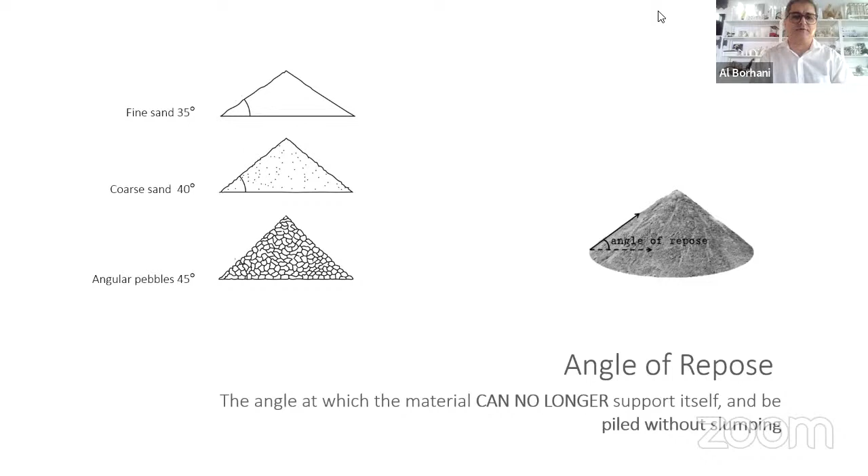The angle of repose is the angle beyond which material cannot support itself. Angle of repose depends on the property of the material, how fine or coarse it is, the moisture content of the material, the amount of friction between the aggregate, and so on and so forth.

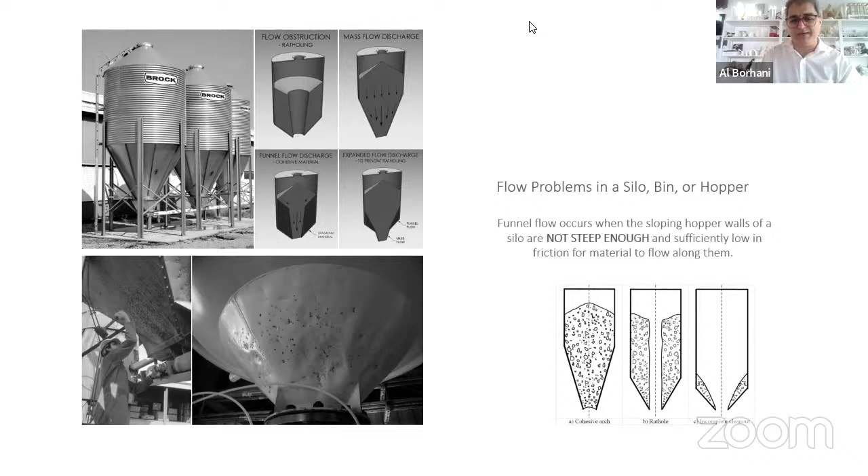And angle of repose is found almost everywhere, from a very small scale to a large one, and in many different fields, including construction and agriculture. Consciously or not, we deal with angle of repose. If you design some equipment, or a kind of bunker or hopper, for sure you should know a little bit about angle of repose. Otherwise, all the time you need to grab your hammer to move material, or you have some difficulty with your equipment.

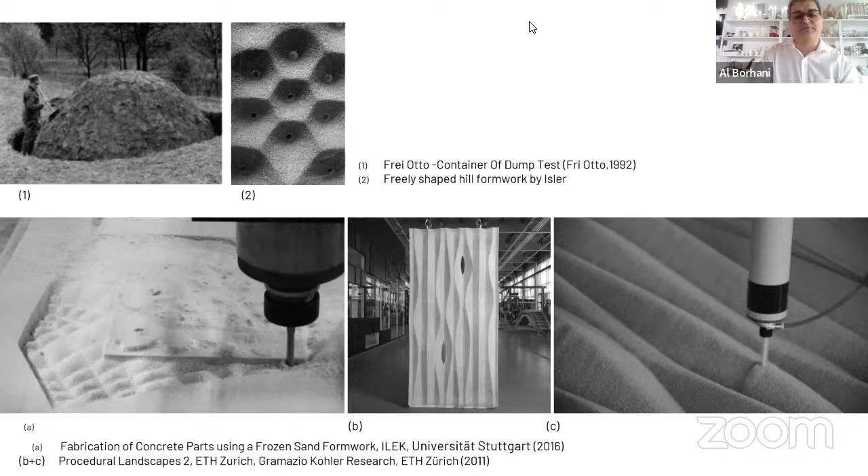Sand is not widely used in architecture, but we have some great precedents, from Heinz Isler to Frei Otto to the University of Stuttgart and Gramazio Kohler Research at ETH. All of them try to push the boundaries. Specifically, I would like to provide you some context on what's going on with sand.

If you have a shoebox, fill it with sand and wait forever, the shoebox is not going to be completely empty. This is a question I always ask my students, and normally they don't think the shoebox won't be empty. Because of the angle of repose, some material is going to remain there. And if you have a box with different holes, as you open up the holes, a certain kind of shape is going to emerge. If you repeat this experiment 100 times in every part of the planet, the outcome is probably exactly the same.

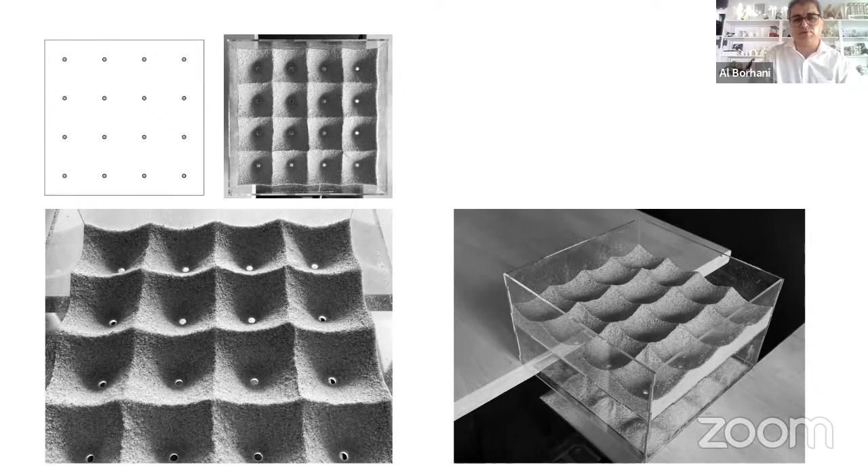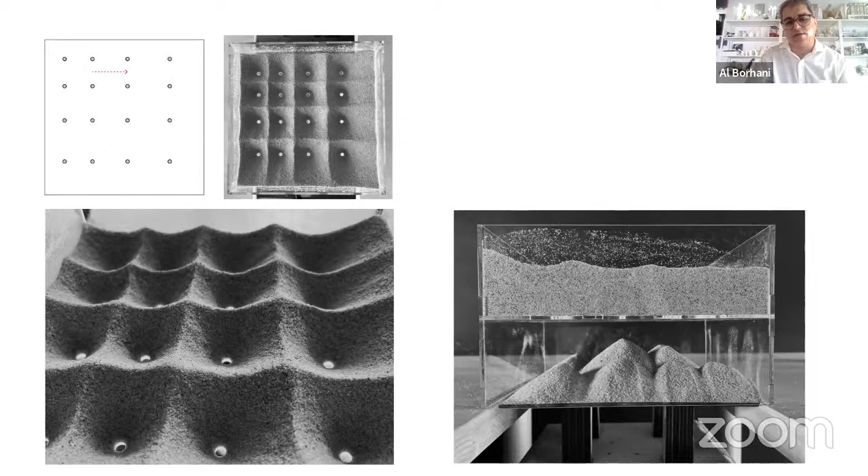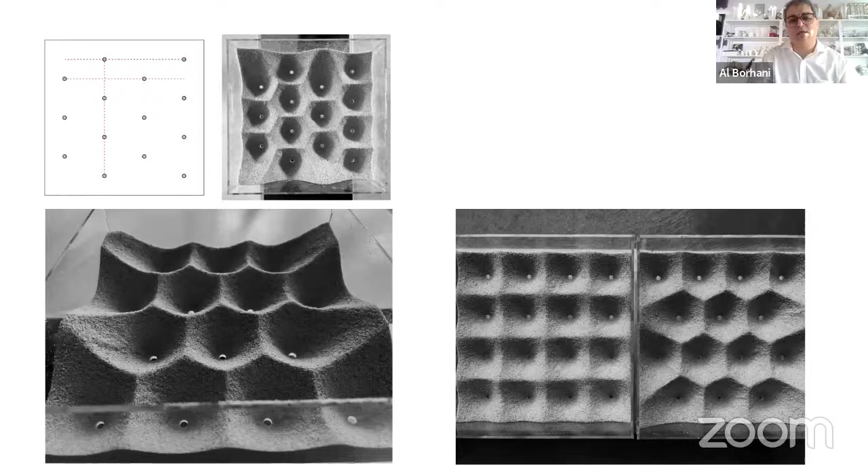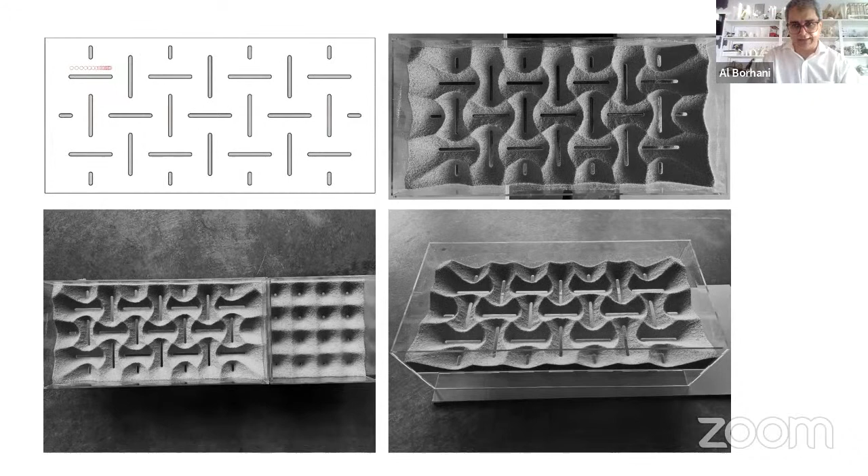The angle that you see here between the surface of the box and the body of sand is about 35 to 37 degrees, depending on the fineness of the sand particles. By altering simple geometric aspects such as distance, size, location, or orientation, you can make different patterns. It's interesting: just by moving some holes, you switch from a quad grid to a hexagonal grid. We can benefit from this principle to make more advanced patterns. In the previous slide you saw just one hole, but if we replicate the hole and create a line, the possibilities would be endless. The line could be straight or curved in any manner you may imagine.

In spring 2016, freshman students at the end of a very long semester ended up with the sand formation process. Prior to this design activity, they used CNC and made molds to cast plaster, and this design activity was probably a turning point for them. In the previous assignment, they forced material to take the shape they wished, but here the goal was to talk and negotiate with the material, and the ultimate goal was to remember that a designer is not the only decision maker. We started with a couple of quotes.

The beautiful conversation of Louis Kahn with brick, when Kahn asked, what do you want to be, brick? Or another beautiful quote by Frei Otto, when he said, the architect is not God the creator, the architect should be a midwife. It means you try to provide a condition and negotiate between different aspects of your design.

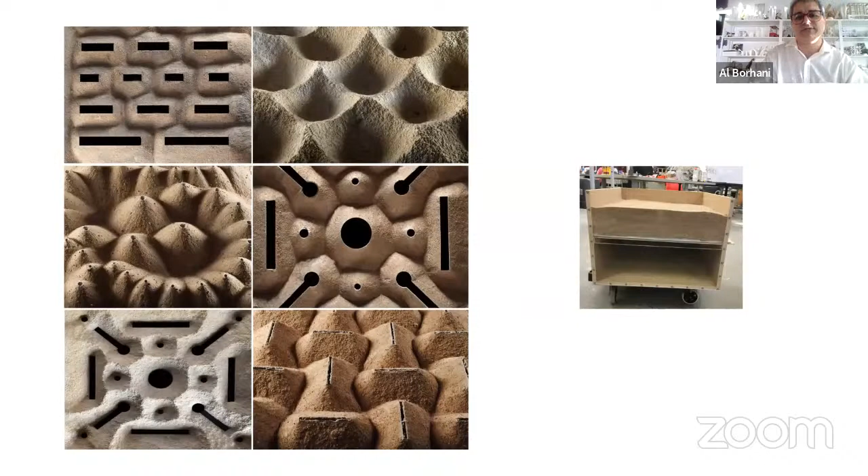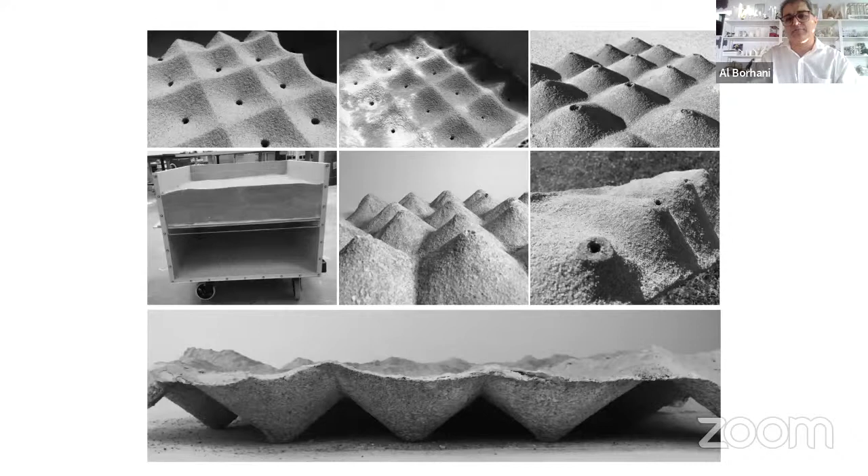Some examples of the front side and back side of the shells. And it was interesting, the journey from 2D to 3D: a very simple way of making a couple of holes on a board, and immediately you could jump to the excitement of 3D work. The process was about adding cement on the top layer of sand, when some water was used to make the shell.

Here we can see a simple diagram that shows maybe 2 different ways to make the shell. One way is to mix cement with sand in the beginning, and then go through formation. But here we decided to use sand as a kind of pure material, and not contaminate it with cement, as long as we wanted to use it many times. As long as we decided to keep the sand pure, we add water and we add some layers of cement. Here probably we can see the process.

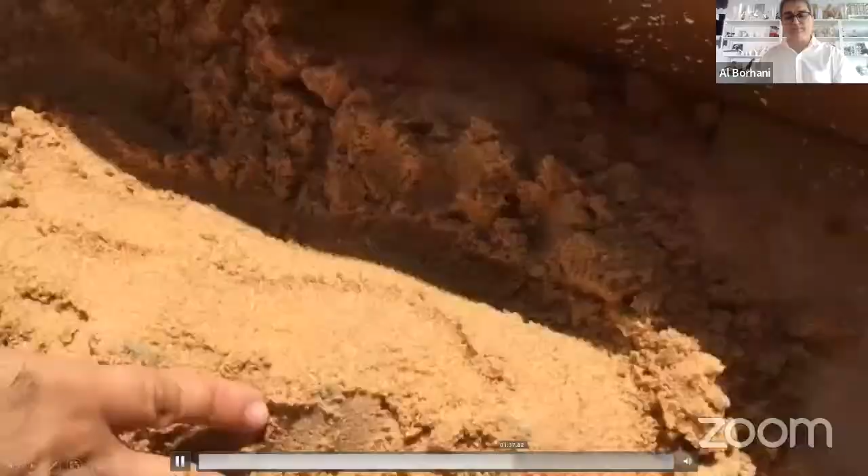This is the first shoebox that was used to see how it works, and this experiment was done by Frei Otto many years ago, and we tried to stand on the shoulders of giants. If I go fast forward, here you can see the holes are open, and the sand simply falls down. And then when we have the 3D form, water was added and cement in layers created the shell. Here you can see the first shell that was made, and then based on this quick experience, we could go forward.

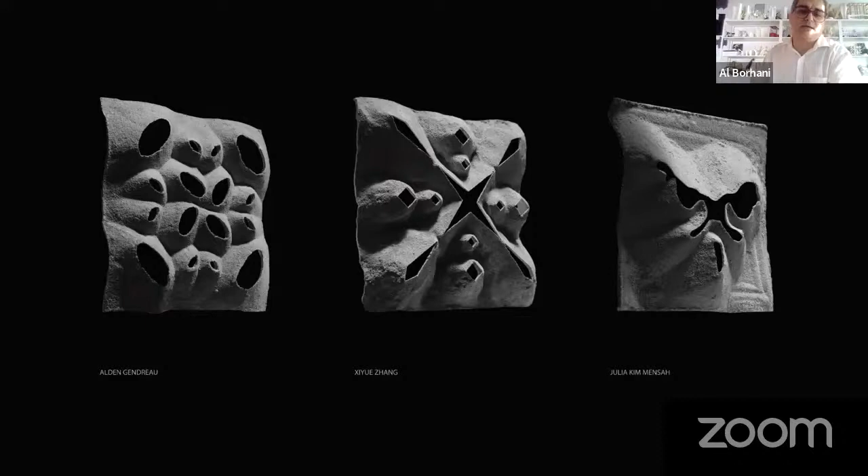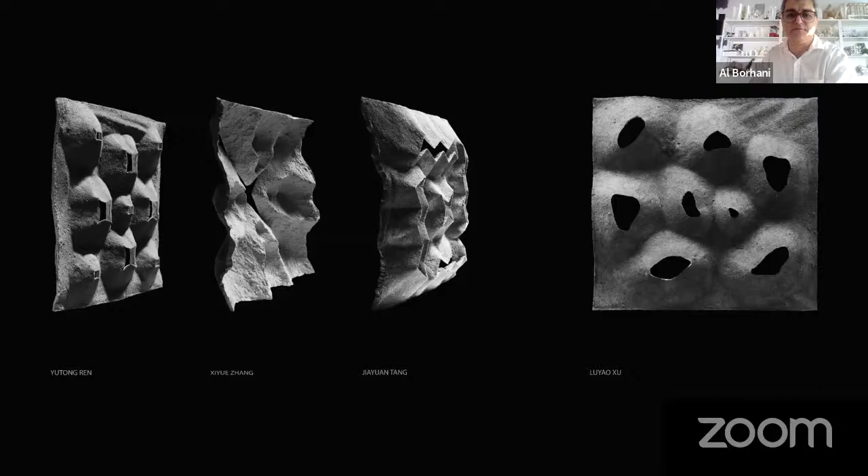These are some shells that my students at California College of the Arts made in 2019. Here we tried to explore more aspects of sand formation, tried to be more courageous to push the boundaries. And this is the assignment that I told you about before, sand formation, when we force material to take the shape that we wanted. And it was very interesting. The same student that made the right patterns could make the left patterns, meaning the same underlying geometry on both. Maybe the flesh is a little bit different, but the structure of both forms is exactly the same.

Here, I would like to talk about another method. It's about dumping sand on a plate. Again, it's based on the angle of repose. When you have a square, the outcome would be a pyramid, and so on and so forth, and depending on different boundary conditions, you create different kinds of three-dimensional form. We took advantage of this to think about a kind of space architecture, what might be a kind of habitat on the moon.

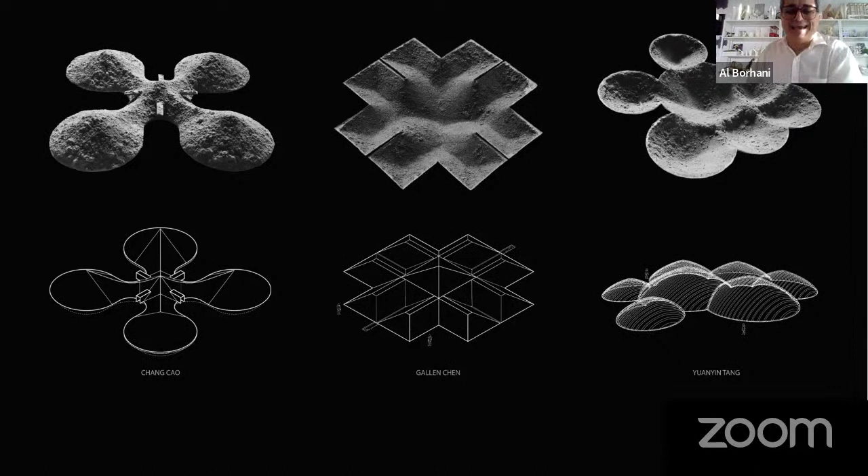This journey started with the question of what happens if you want to take one brick from Earth to the moon, how much you should pay. Based on NASA's estimate, you should pay $250,000 for moving just one brick from Earth to the moon. And still we are talking about the moon, not Mars. For whoever wants to make anything on Mars, it's 6 times more expensive.

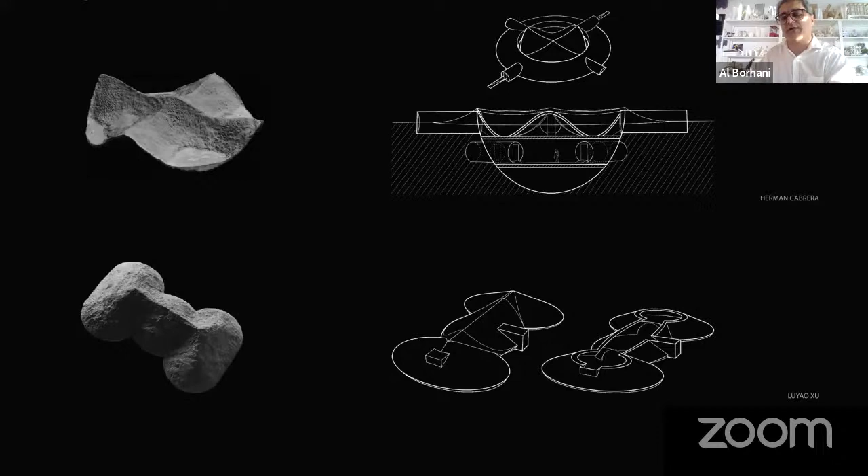And the question is how we can take advantage of the existing material that is on the moon, and think, okay, we don't have any shoebox over there, and if we want to make this kind of shell, what can we do? Probably dumping could be a solution, and maybe the surface could provide some opportunity for 3D printing. It would be a kind of scaffold.

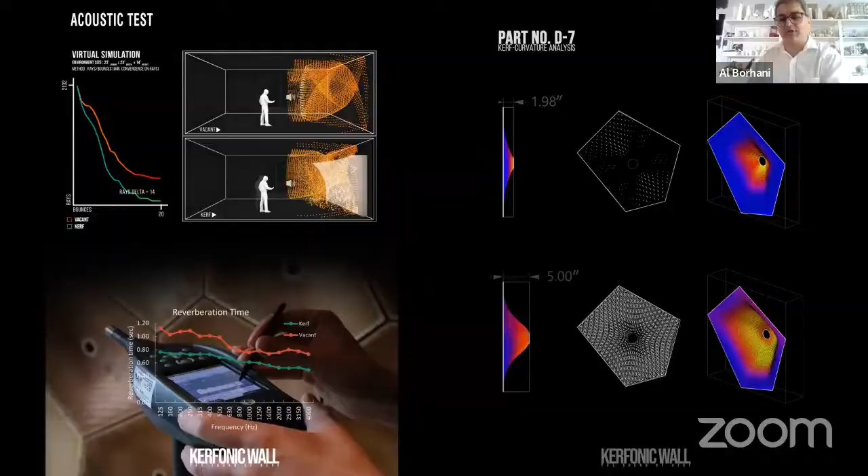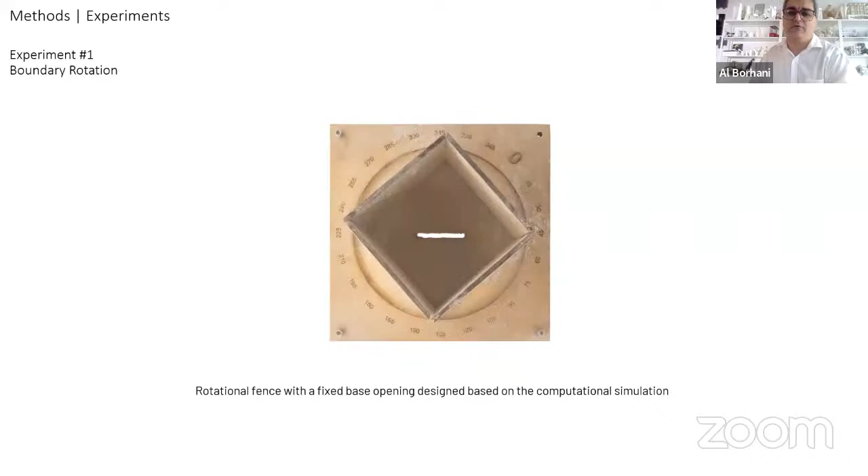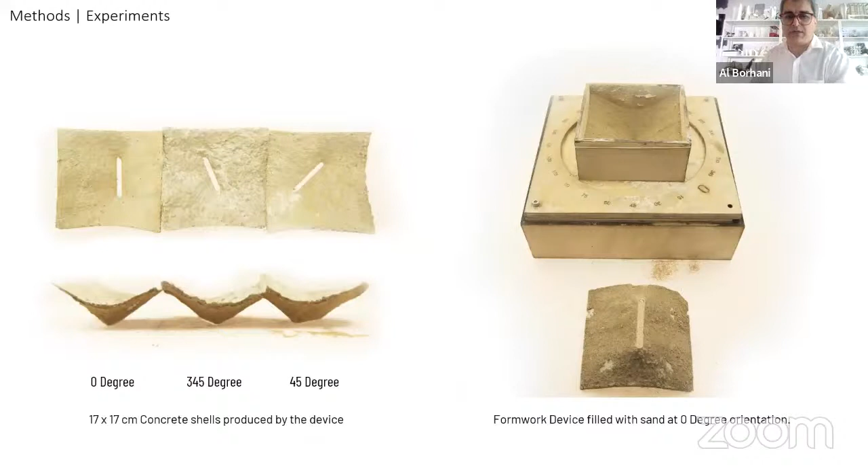This is the last thing that I'm going to share with you. A project that Jiris Alali, Nigar Kalanta, and myself were involved in. Jiris pushed it forward for a long time. Jiris came to California College of the Arts to pursue his master's degree, and the goal was to think about low-tech and high-tech. The way this research proceeded was to think about one formwork that could create many tiles at the same time, taking advantage of the angle of repose. By making a device and having some openings, we could create different tiles.

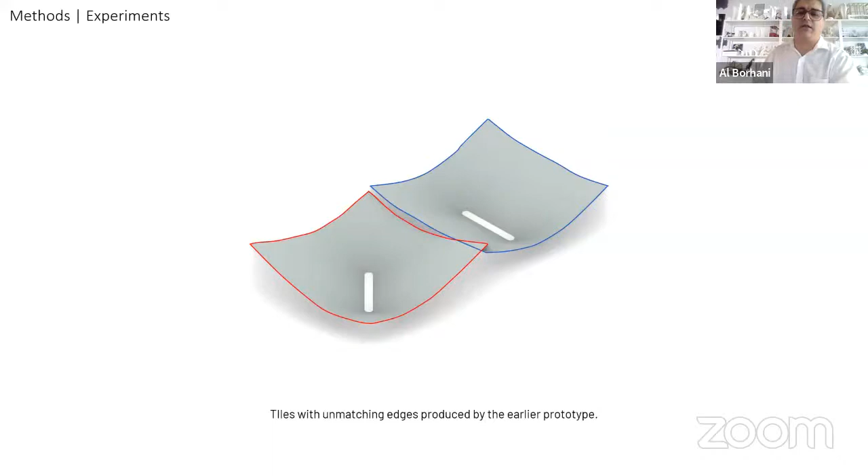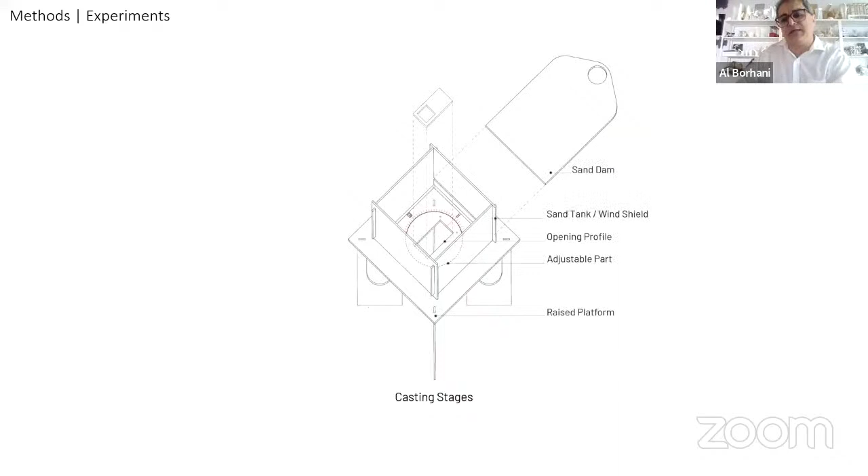The design question was about the condition of edges. As long as we turn the device, the material doesn't have any tendency to create the same curvature for every tile. And then we decided to push it forward. The solution that Jiris ended up with was to create the edge free, and the goal was to have a device that we can simply take to a site and do the process of casting over there. And by changing simple pieces, different parts could be made.

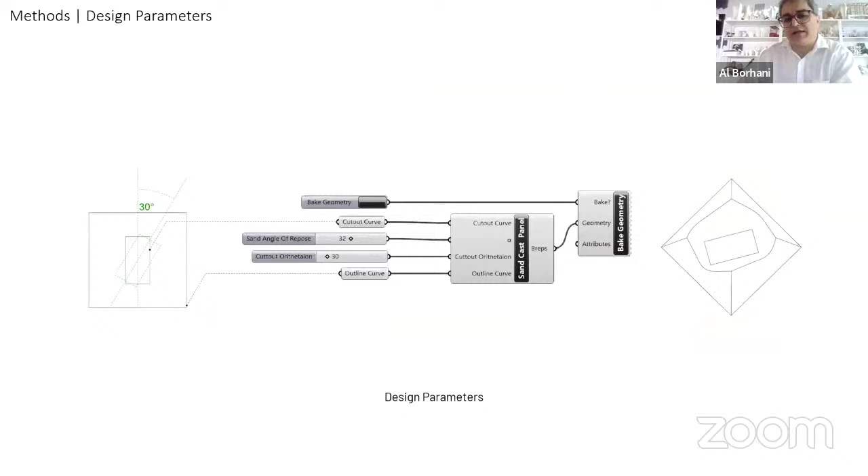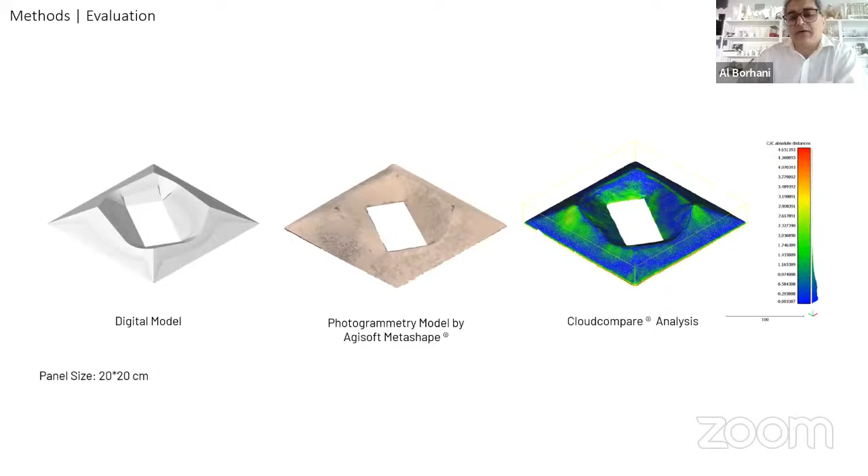Here, a Grasshopper definition was defined to do simulation quicker and faster and see the result in cases where we could not do prototyping, especially during the pandemic. And when we did some scan analysis and compared the shell that we made with the Grasshopper model, it was pretty accurate.

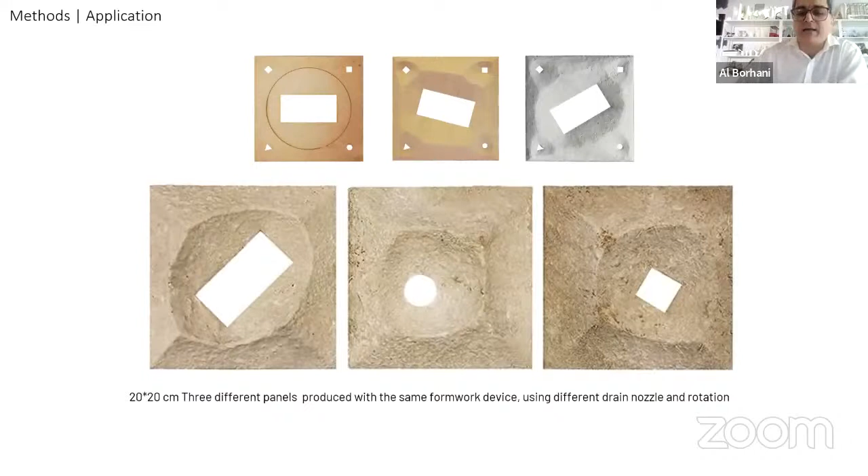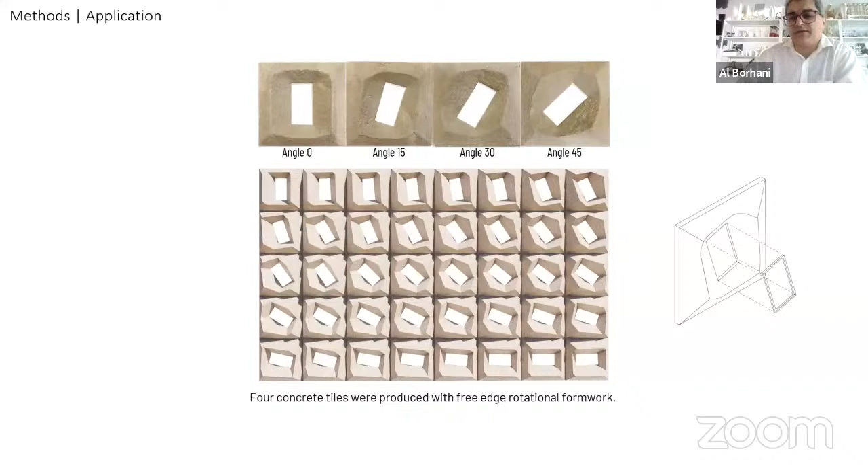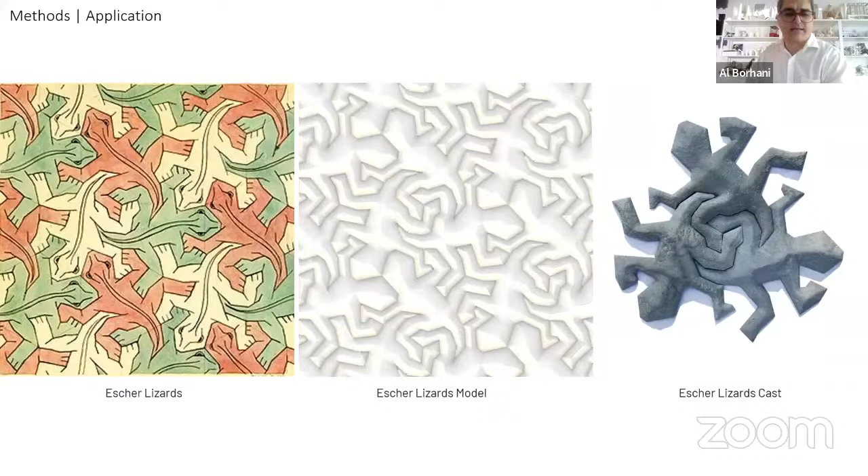Here you can see different kinds of patterns. Panels could be made by changing simple parts, and it could be a possibility to think about some kind of fenestration, some kind of tessellated tile for building envelopes. And by using a dumping system, Escher patterns were investigated. And as you can see, the process of formation is super fast. And then the question is how you are going to use the formwork to make the tile.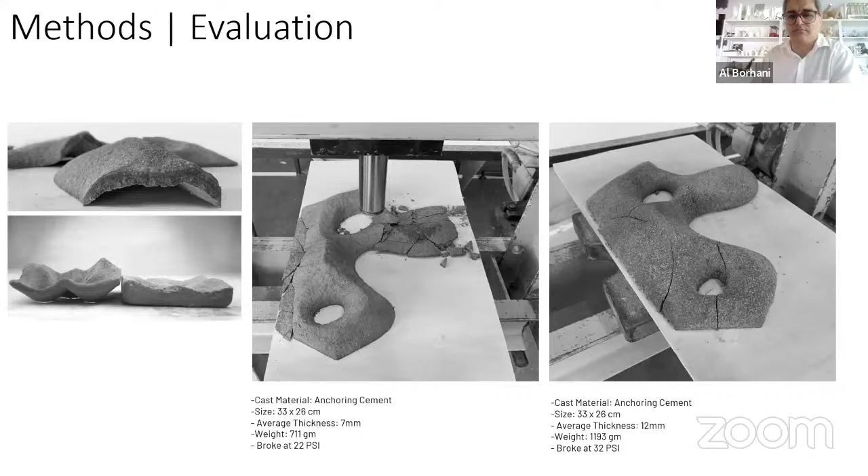And at the end, some structural evaluations were conducted to see how much load they are going to carry without using any material at this point. We didn't add any fiberglass or any material to the combination of cement and sand, but for sure more lines of investigation are going to push forward.

This is a brief introduction of something that we enjoyed in the last couple of years, and we hope to learn more from our discussion. Thank you.

Al, thank you so much. Inspirational. So many questions I have for you already. It's a pleasure to see that work. Now, I'd like to introduce our second guest. Jumaanah Alhashemi is with us.

Jumaanah's presentation will first look into sand material explorations done on a micro scale using laser sintering processes. The second will look into macro scale implementations and the potential interaction between sand and water and green facades. And Jumaanah's presentation will close by looking into applied digital fabrication strategies that allow for sand to remain transient and take part in a dynamic ecosystem to help us reshape our experiences with materiality.

Jumaanah, welcome to the session. It's a pleasure to have you here. And I'll let you share your work with us. Looking forward. Thank you so much for gathering us today as well. Let me just share my screen. Well, thank you so much, Marcus, again. And I feel like this talk has been very fitting, especially since Earth Day was literally a day ago.

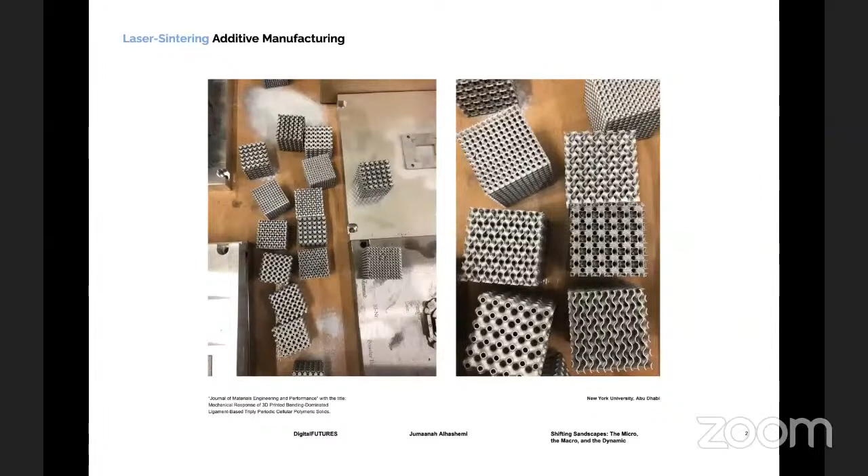And so my topic is really looking into shifting sandscapes, looking at the micro and the macro and the dynamics of sand properties. So my experience with sand has been really incidental. I really started working a lot with direct metal laser sintering technologies, specifically with EOS 3D printers. And EOS is one of the leading German companies that have really worked with powder bed fusion and depositing of materials on a layer basis. And at that time, I was getting trained as an application engineer in Germany, so I was going back and forth.

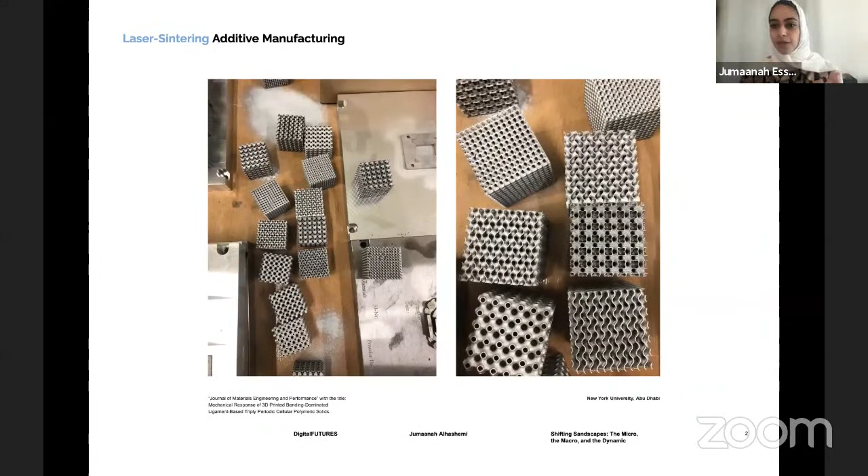And at the same time, I was doing my fellowship at the Rhode Island School of Design as well, and learning glass for the first time. And I felt like this process was extremely insightful. It was almost like this eureka moment, really looking at granular materials and trying to transcend them from one state to another, from sand to glass, for example, or from scattered to gathered, and looking at these different explorations that I've done.

And to be honest, it was a really inspiring journey, because it really started getting me into these other disciplines, and being a transdisciplinary designer and artist, I really believe that there's a really great relationship or sparks that happen from trying to shift or travel between different disciplinary borders.

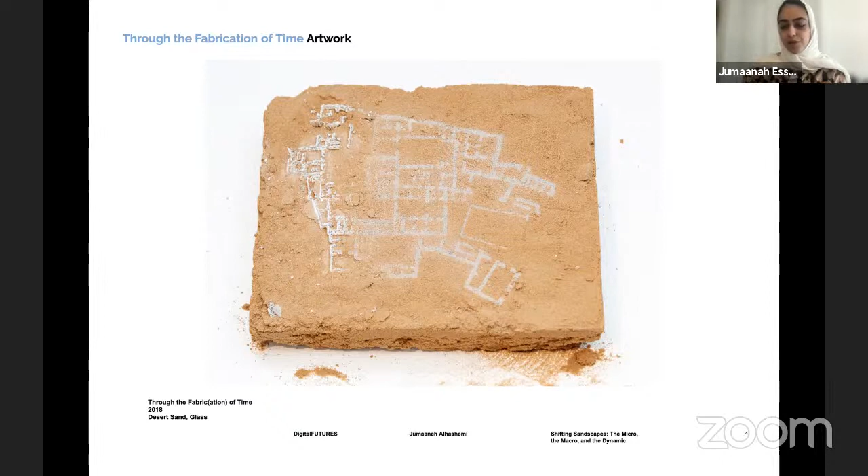And through this work, I actually ended up pursuing my master's in digital and material technology at the University of Michigan. And so I wanted to really start looking at the micro. So what is sand as a granular material, and what really happens on a micro scale? And in here, what I was really trying to do is understand the difference between silica sand and desert sand specifically. So I'm from the United Arab Emirates, and the desert is a landscape that I'm extremely familiar with.

And it's a landscape that I've been exposed to my entire life and have extreme appreciation for, and really believe that it's become a part of not only a natural phenomenon, but also a part of this culture and identity of trying to preserve it as much as you possibly can. And so I was really looking into desert sand and silica sand on a micro scale, and what makes them different, and why is silica sand more favorable, and why is desert sand really frowned upon in the industry.

And really, the problem with desert sand is that the grains are traveled by the wind, and the wind actually makes them extremely rounded. And for that reason, it makes them really unstable, so you can't really bind them properly. While on the contrary, with silica sand, the grains are extremely angular, so they fuse better, and they're mostly shaped by water, and they're found in beds and banks and floodplains of rivers, and in lakes and in seashores.

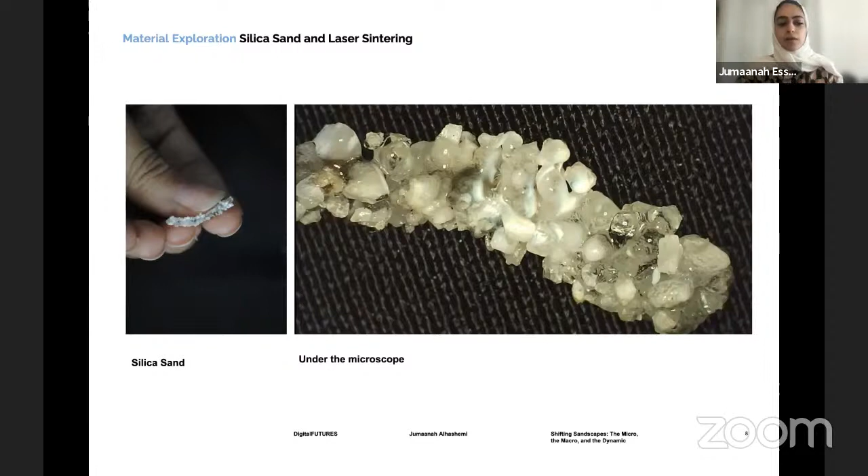And so what I did first is really simple. I just scattered some sand onto the bed of a laser cutter, as simply put as that, and tried to sinter as much as possible, very slowly and with the highest power that the machine would allow me, to try to create glass. Sorry. So on your right you're seeing it more under the microscope, and on the left you're seeing it in its real scale.

And then after that, I wanted to see if possibly there's a way to fuse the sand together while also doing the sintering process. And in this case as well, I have also worked with water-based agents, specifically sodium silicate. So what I did is as simple as going through hatching patterns that are sintered by the laser. And as you can see at the bottom, is the glass that is sort of trying to emerge while also keeping it bonded.

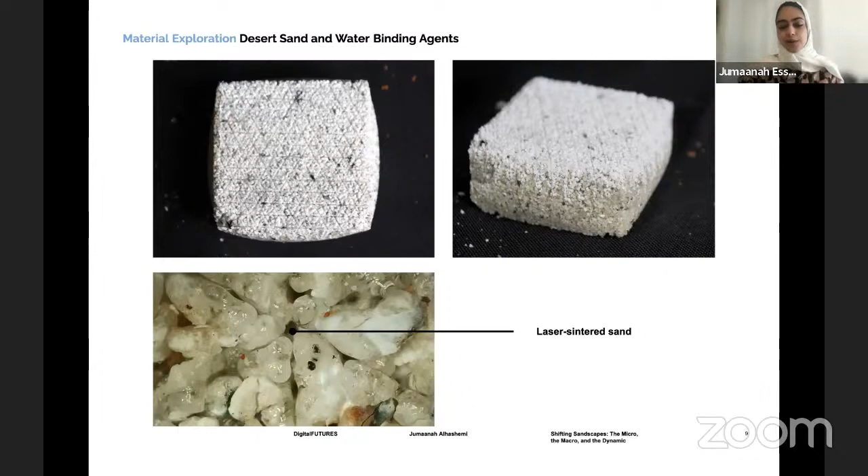And this is using finer grains of desert sand. And as you can see, because it's quite fine, it looks extremely neat when it comes to the laser sintering, and the glass penetrates through evenly. And it's really trying to see what occurs with the sintering as it's creating this molten glass. And the more that you run it through the sintering process, it will keep forming more glass. But it takes a really long time though. Like this piece took about 4 hours to actually sinter it to something close to glass.

So they've built this entire neighborhood that has become abandoned because of the moving of the sand and the wind constantly having to push the sand inside these houses that have become abandoned. And it really shows you just how remarkable and how strong and dynamic winds can really move particles from very large distances into creating these really large volumes and bodies of landscapes.

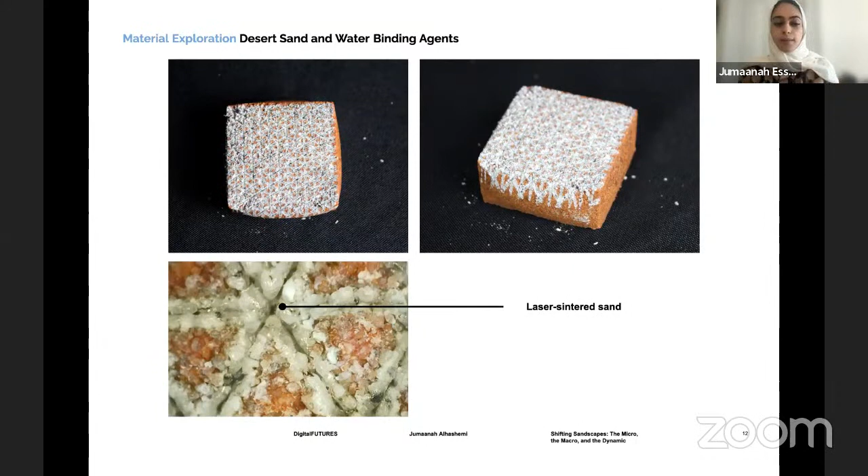So now it's really looking into the macro, more on an architectural scale, and really trying to see how sand can be a material that allows for the delivery of water, specifically through capillary action. So this body of work was really made with great colleagues of mine that have been such a pillar in making this happen. So this is a project called Wild Wall, which has been done in conjunction with a class last semester that I've taken at the University of Michigan called Material Engagement, under Dr. Mania Meibodi.

And it's really looking into creating a green facade that can be powered by some form of capillary action that allows for the water to keep going, allows for the collection of rainwater, and really allows for it to resurface back into the facade by capillary action. So this is a concept that has been just in the conceptualization phase. It's really looking into incorporating the sand inside as a way of insulation, but also as a way to allow for the movement of water to surface up to the pods, which you will see later. So these are just some tests that we've done that we believe might work, but this still has to be studied even more to see if it can be employed.

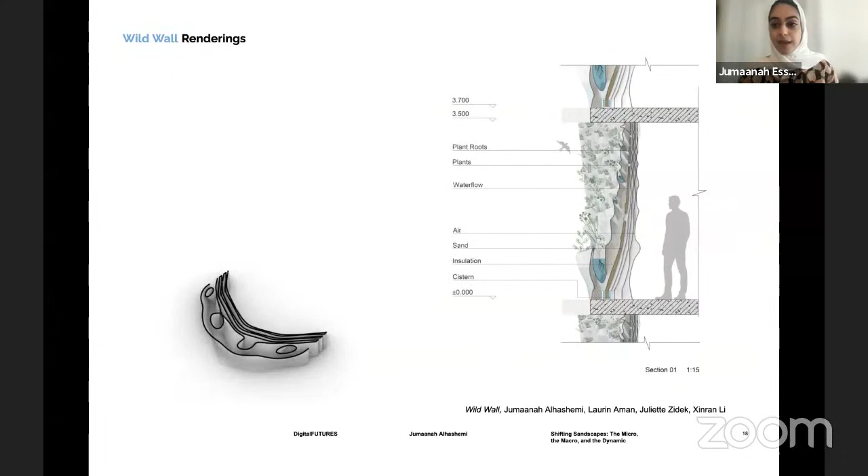So the project was mainly looking into 3D printing facades, and we were working with plastic pellets because that's what we had for the time being, and that's what the extruder, the end effector, was working on. And so what we did is we designed these pods that are ranging in size according to the plants that they would house, and it's computational and can be changed. And what you can see on the left is the sectioning of the 3D printing that allows for these pods to form.

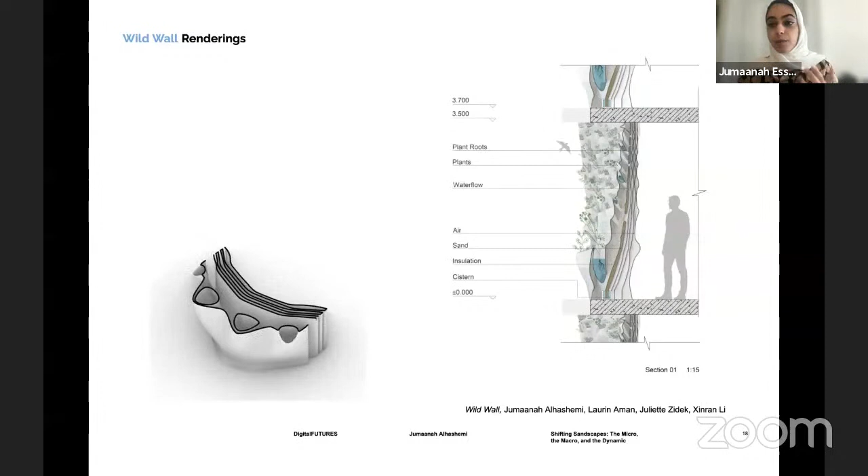And then on the right, you would see a conceptualization of a section that we have, looking into how the sand could be housed within this structure, within this facade. And what's really amazing about 3D printing is that it allows for 3D printing a multi-layer facade in one go, rather than having to add these different aspects of the facade.

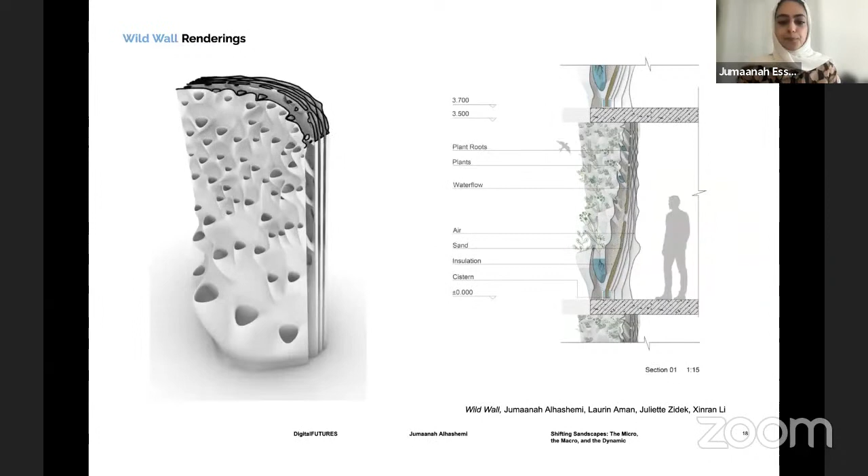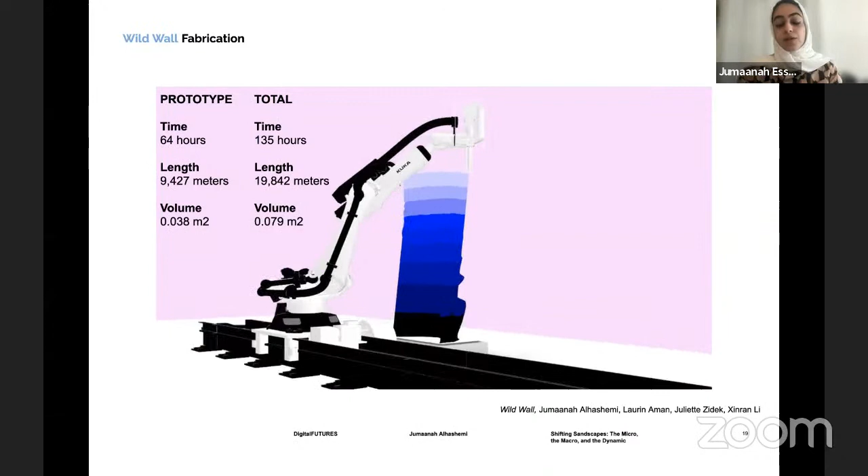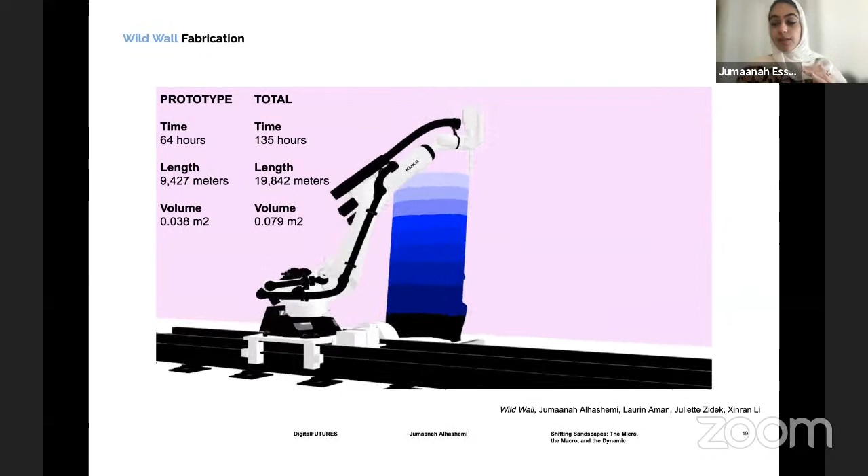So the prototype took about 64 hours, and it was around 9,427 meters. Of course, we didn't reach all the way to the top because unfortunately time is of the essence, but we were able to reach the first 4 levels or sections of 3D printing. And of course, it's limited to how much the robot pendant can hold as a file size as well. So this is the process of 3D printing it, creating this path that could be continuous, and also generating these pods and seeing if there is a way that we can actually house a couple more materials inside. So this is basically the process video.

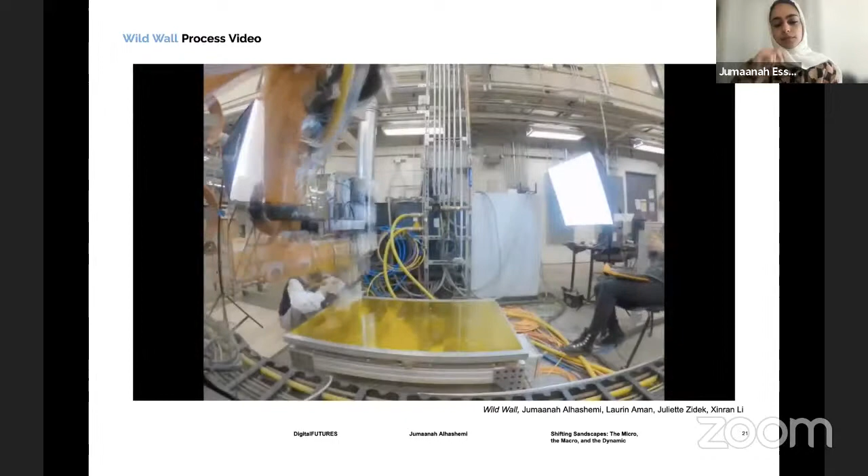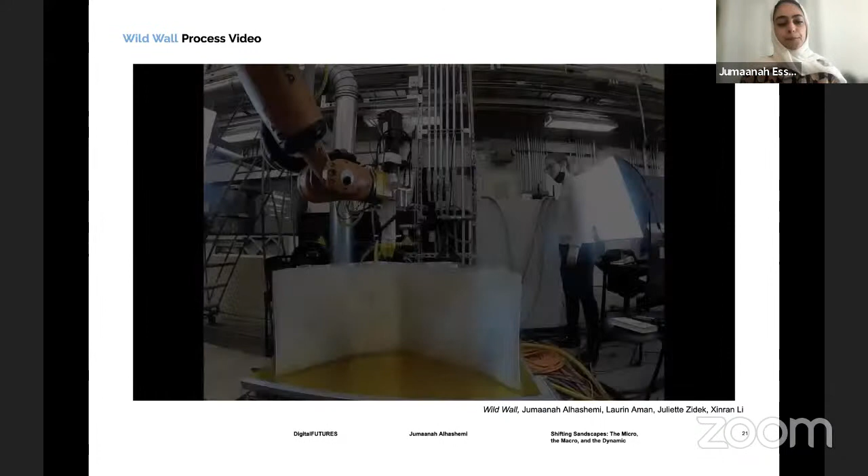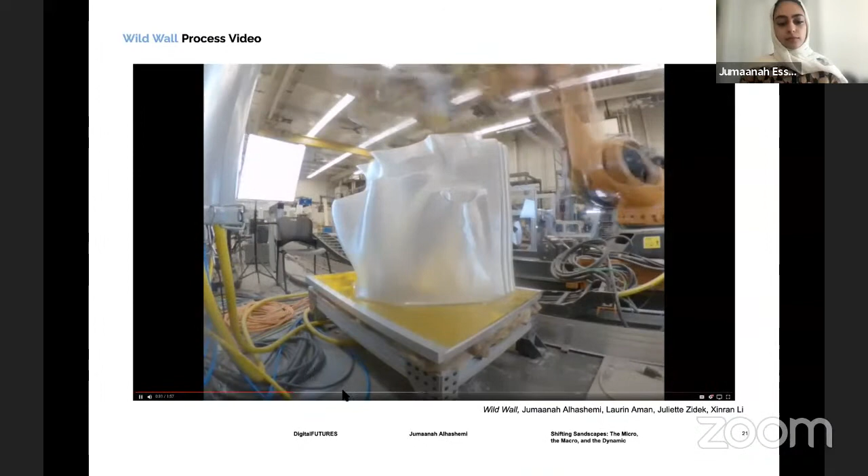So this is the back of the 3D printed facade. And this is the second layer of 3D printing. So this is basically just a prototype that we have been able to 3D print. And it took around, if I'm not mistaken, 36 to 40 hours.

And it's really showcasing how these, and really we've added some plants in there to just see how they were being housed in the pods. And this is sort of an artistic shot into really seeing the scale.

So now I'll be shifting into really looking into the dynamic and really allowing for sand to allow for impermanent structures to emerge, and also allowing for it to be transient. And to be honest, as Al has mentioned as well, sometimes it's good to let go as a designer and really allow for the material to flow the way it should flow. And it was a really great exploration into understanding how sand particles really accumulate and amass, and really thinking of a way to really work with that.

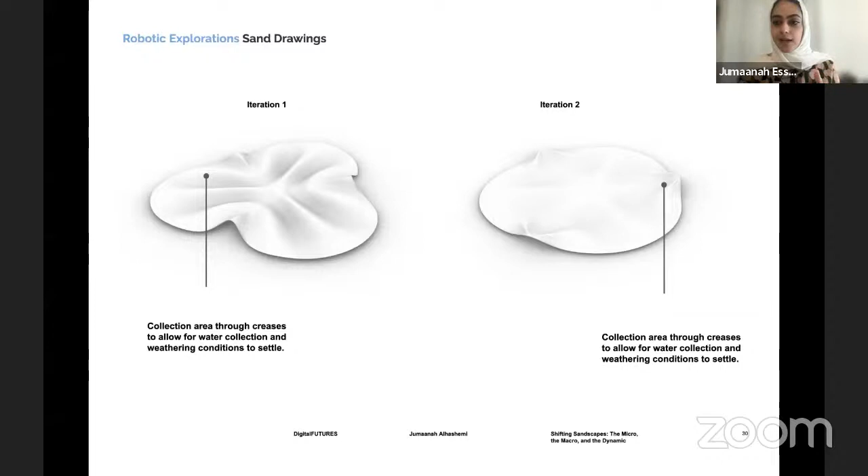So what I was really looking into is designing this path, or these really simple movements that allowed for the robot to move the grains around, and not really dictating exactly how they might look, but trying to see and understand how the grains were to form. So as you can see here, it's such a very clean curved surface, but with the path of the tool as well, that allows for these different surface articulations to really emerge.

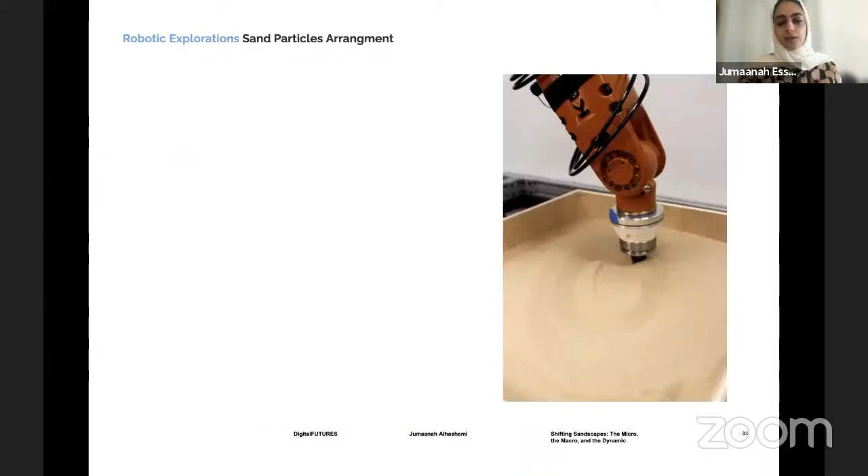So there is one over here, and then this is actually a very quick study that I've done. This work is still in progress right now, but basically allowing for this incremental forming of the sand as well, to go down very slowly, and to allow for the sand grains themselves to try to rearrange themselves within this path, and it really created its own sort of path. So as you can see here, it's almost like the path has been offset somehow, which was really interesting.

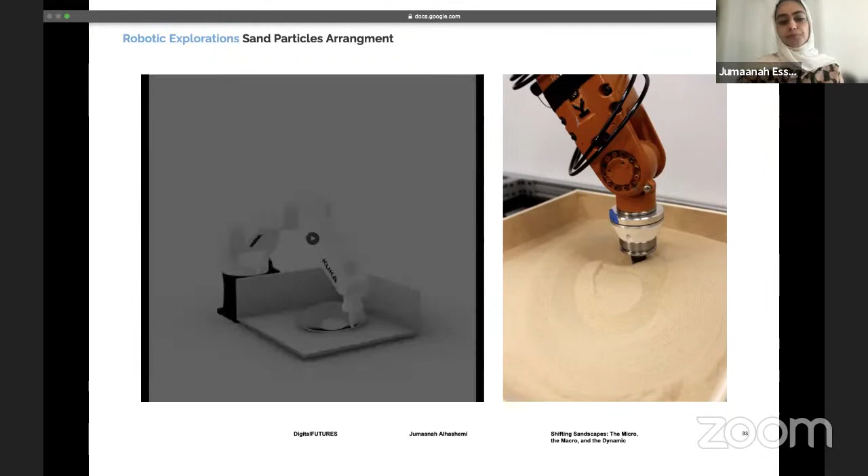And what I did is that I slowly sprayed onto it some water-based binders to allow for the hardening of it softly, to allow these different articulations of the surface to remain, and to allow these really thin shells of sand to form. It was a really quick study, and it's currently still under work, but it's really interesting how thin but how strong the shell has been, and it's been sitting on my desk for quite a good time now, and it's really surviving.

The next step is really looking into seeing what happens when you apply a very strong amount of wind, and what happens when you put it into these different weathering conditions that occur in nature, especially in the 4-season climate, where you have rain, snow accumulating on the surface, and very strong winds that could allow for this movement of sand to take place again, especially since the structure is not as perfect or as pristine as it should be.

And that's basically it. Thank you.

Okay, Jumaanah, thank you so much. Really inspiring. I can't wait to get further into your presentation and also Al's.

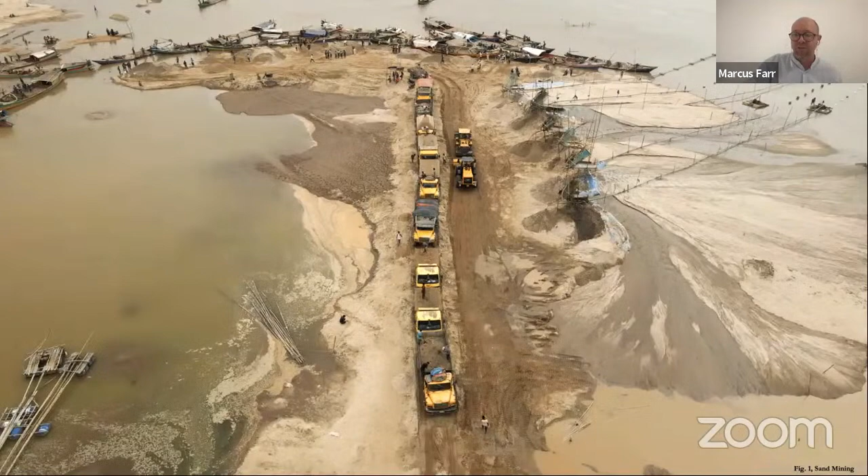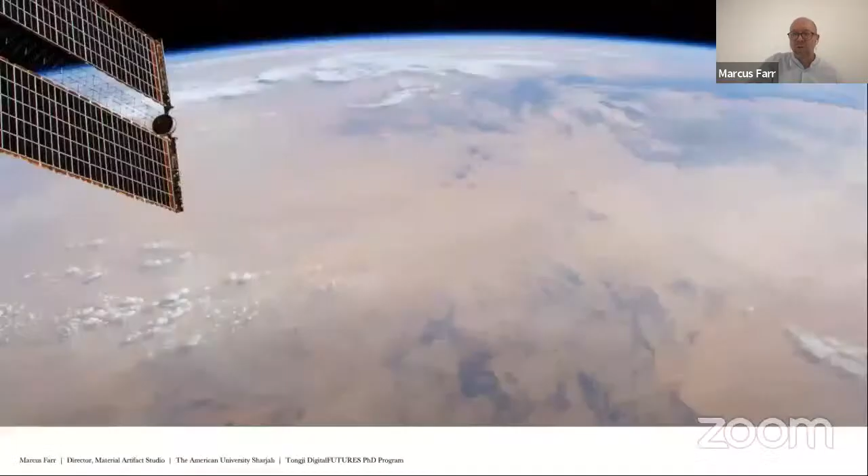And the UN projected that sand and small-scale aggregates will continue to be in demand above all other materials through 2060 because of the almost unlimited need for concrete and consumption of concrete in the world. So this sand that's mined is also being shipped thousands of miles around the globe to build buildings in different regions that are very different from the locations that the sand was gathered.

It's estimated that only 5% of the world's sand is usable for architecture. And so construction sand comes from rivers and beaches and special mining locations. Marine sand and river sand are very different than dune sand, as Al and Jumaanah have already mentioned. One is conditioned by water and the other is conditioned by air. And the largest deserts in the world contain dune sand as opposed to marine sand mostly.

So a huge percentage of the world's most desired construction resource cannot be used based upon current construction processes. So this for me is an unsustainable relationship between the amount of sand that exists compared to the amount of sand that we use for building.

The contrast continues as population explodes and desert cities invest in architecture that fuels a continued need for these processes, and urban centers such as Dubai, which is where I live, Dubai and Sharjah, and the relative proximity to so much unusable sand creates a striking contrast between resources and construction methods. And so the buildings here constructed of steel and of concrete require sand that is much different than the sand that we have in our context.

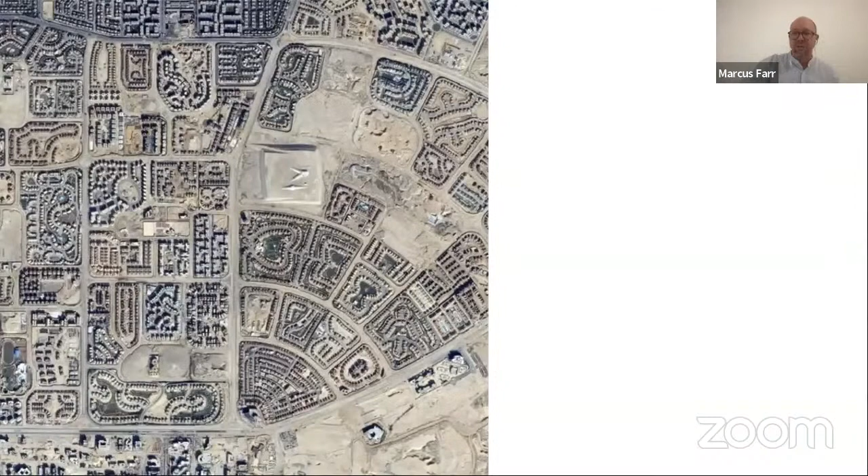So my research interests really explore material development using dune sand as a local material resource for architecture in desert communities in the Middle East and North Africa region. So more specifically, as it relates to material, a lot of the materials that are vernacular to this region employ other materials besides sand, mud and coral and other things, shells. But sand is not really found as much as a primary element in the vernacular materials because sand needs a binder.

And dune sand is difficult to work with and cannot be used in concrete the same way that marine sand can be used because of 5 primary qualities. Number one, it's round in shape, it's very smooth, it has a particle size that's very fine, and it's alkaline in nature. It's also very dense, similar to dirt, so it's very difficult to work with and to make concrete out of.

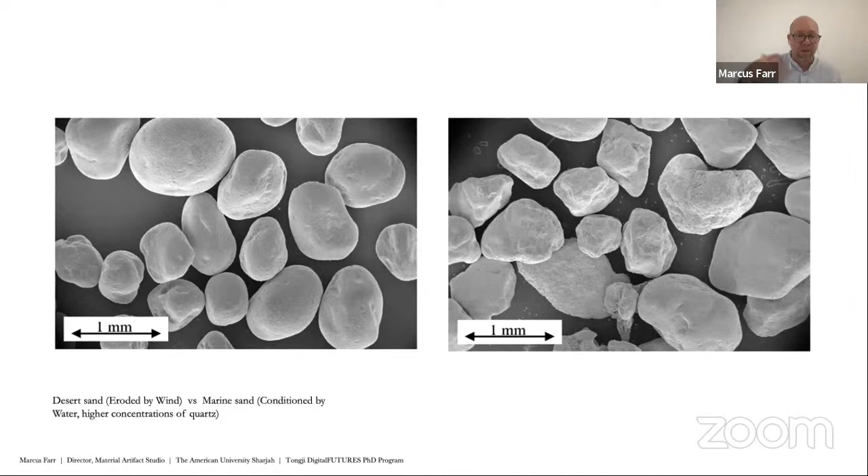And so that leads me to my first material experimentation. So the first part of this research looks at how dune sand can be combined with binders to create a sustainable building material for our region. So the caveat here is that toxic glues or resins of any form really are not allowed in the work.

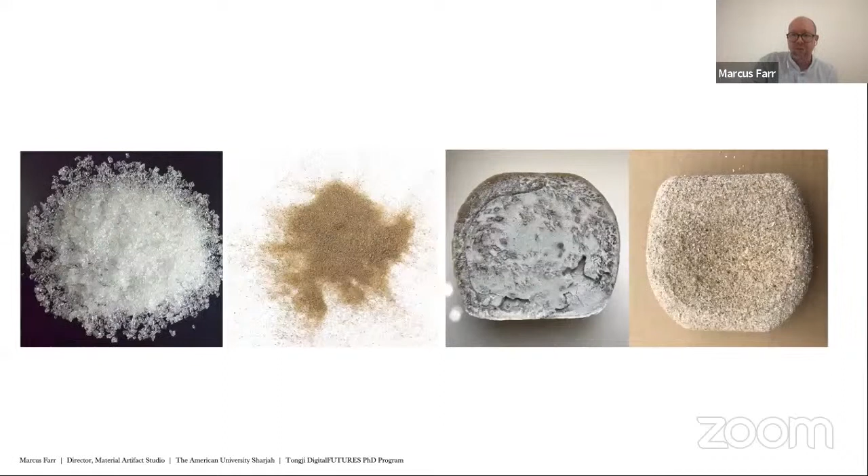The EPA and the American Federal Food and Drug Administration consider it safe to use in foods such as table salt. And the strength of this varies based upon the amount of sodium or salt and sand added together. So the additive is effective because it changes states with temperature variation, which allows the sand and the salt to bind together in a superheated mixture. And upon cooling, this process forms a strong unit. So essentially we're moving from solid state to liquid state, back to solid state.

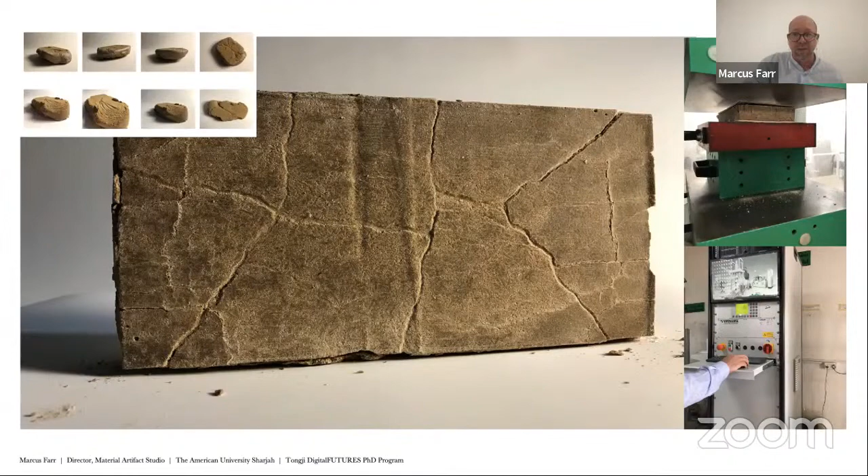But the creation of a biomaterial that had compressive strength was really a significant step forward for this particular moment in the research, because it led to the possibility of an organizational system that could be applied to local scenarios in the Middle East, namely mashrabiyas and jali walls, which are very common in the Middle East and also India and North Africa. So since one block size is being used to create the mashrabiya here with a single point of connection in the center, it allows the bricks to be cast exactly the same and operate independently of one another.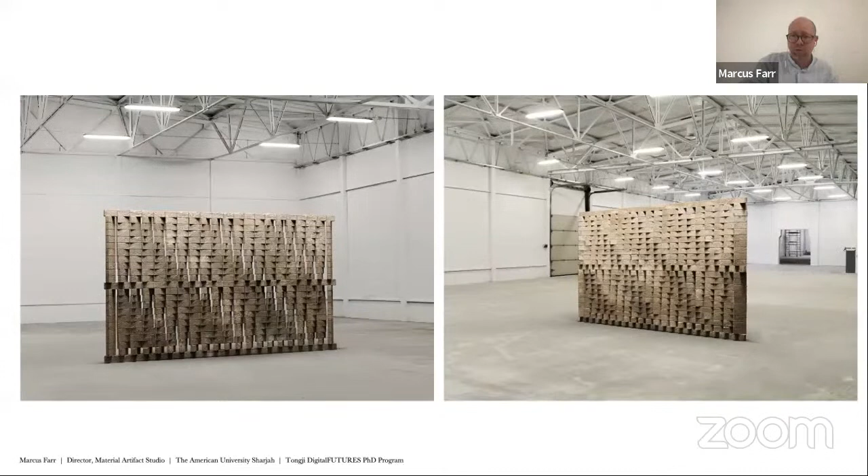So this was the result of the sodium sand wall. And this was the result of the wall condition with only 2 of the materials, just dune sand and the sodium. And so this was a step in the research that led us to another material exploration, really because we felt that the sodium was not a long-term answer in terms of sustainability. And so we were looking for additional approaches.

And so we looked at some material that's used by the US military to make roads and tracks in tropical locations and extreme climates. This is a low-cost material. It is not affected by the sun. It's also really important in that it's non-toxic to plants and to animals, and it's water-based, which is very different than some other materials that we've used with the sand.

And so this is a slump test that we're seeing here. It's normally tested as a spray-on material with road crews to make roads and trails and places for cars to drive on. We tested it as a formative material for 3D printing. And what was desirable with this material binder as compared to what we did previously with bacteria or sodium was that much higher concentrations of sand compared to additive can be used, and it doesn't require a lot of binder to generate a large amount of material.

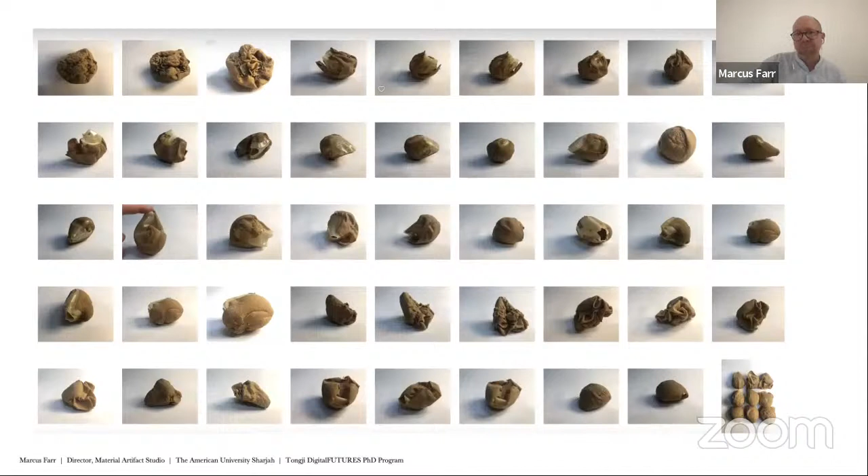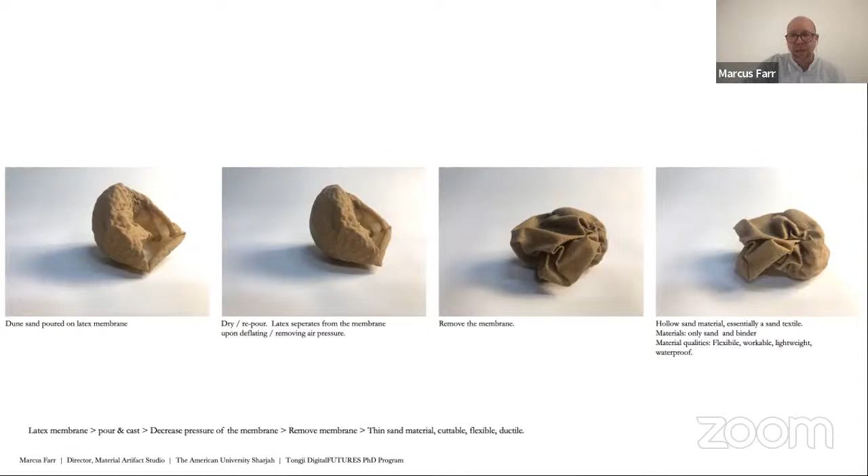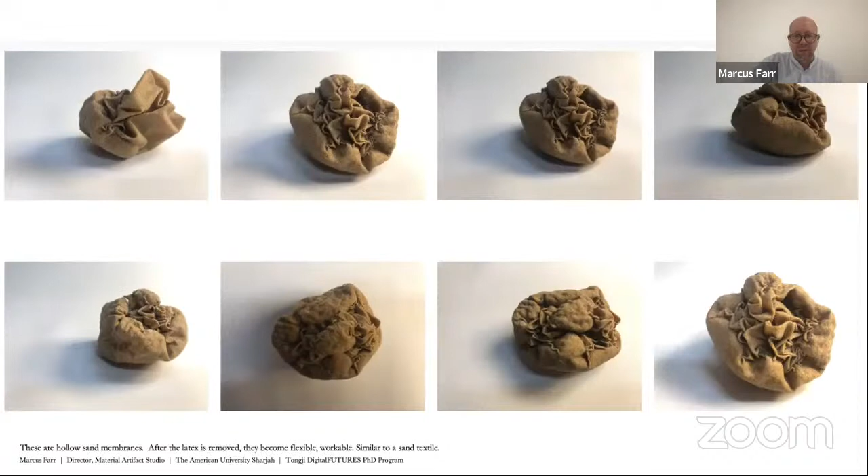So we tested the workability and the castability of this by pouring it on latex membranes, and then allowing those membranes to change sizes, to get bigger and to get smaller, basically by adding air or removing air. And it created a series of iterations that really are kind of these flexible, workable, sandy textiles that start to look like this. They're flexible and kind of rubberish in nature. And this is made from dune sand and one binder, and they're flexible.

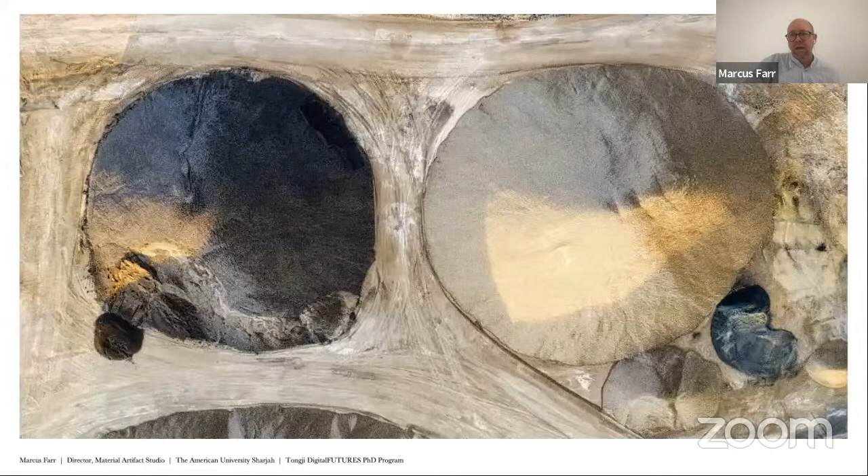And so that led us to look further or deeper into how sand behaves as an organizational material. And what's interesting, I think, that's come out in the first two presentations for me is that the angle of repose is important to everyone's work.

That when you use sand, this is just kind of a part of how you think about it and the limitation. So it becomes a critical threshold, working with piles and small aggregates and angle of repose. And so it's typically between 34 degrees or 45 degrees, maybe depending on the size of the aggregate or the sand. Wheat is different than sand, and concrete aggregate is different than wheat.

But this is from Mathematica, and it's really similar to what Al was discussing. When you pile sand on an articulated plane or a limited plane, which is different than an infinite plane that you find in the computer, the shape of the plane can begin to affect the shape of the pile. So round planes create different piles and rectangular planes, etc. And it was really fascinating for me to see that in your work, Al.

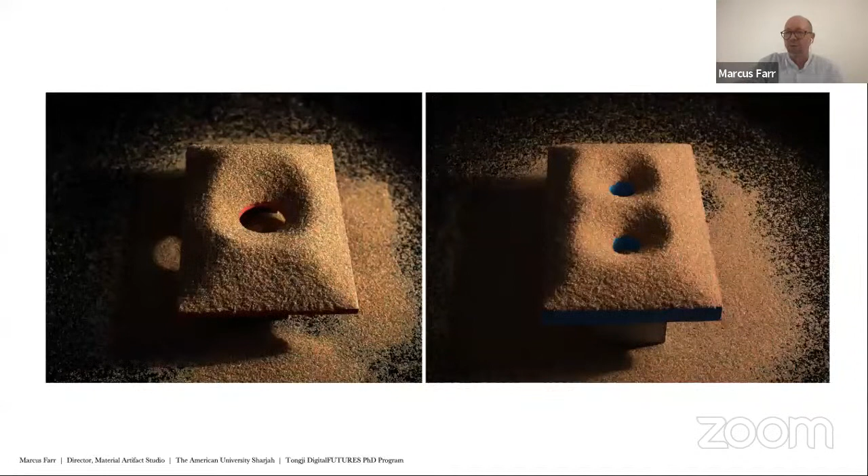So when sand is poured onto a lifted plane, with openings, we start to have a kind of response in that. And these primary factors of resting plane, angle of repose, and gravity are used to evaluate these piles in laboratory conditions and in computer models, but they can also be controlled and planned and manipulated. And those exist along with another factor, which is wind.

So this is a Houdini simulation video that uses the primary factors of the 34-degree angle, plane, gravity, force that's consistent, along with wind force and wind speed, in order to start to predict the way that sand is going to behave, even though it's something that's very organic and has a very high degree of freedom in how it simulates itself in the natural environment.

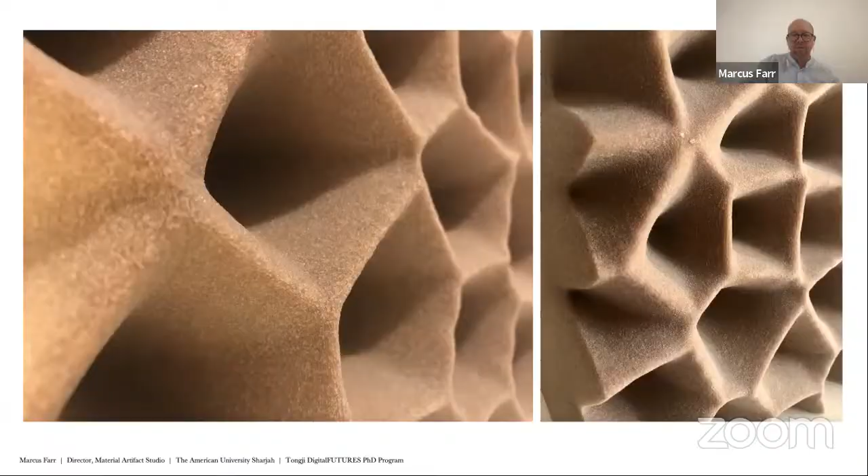So on closer look, it's revealed that an ongoing series of these repetitions can be created and can be controlled and used. And so this is a 3D printed block that came from that idea. And this is the other side, kind of both sides, very similar to what Al was sharing with us.

And what's interesting to me about this kind of method is that the openings can be controlled, and the top side and the bottom side, let's say, can be controlled, but then it also can start to result in different thicknesses and different aggregations. And then the planes that we use to start to control or stop the sand can also become a way to think about moments of flatness or moments of connection, or other ways to think about how that sand could be used as a kind of substrate.

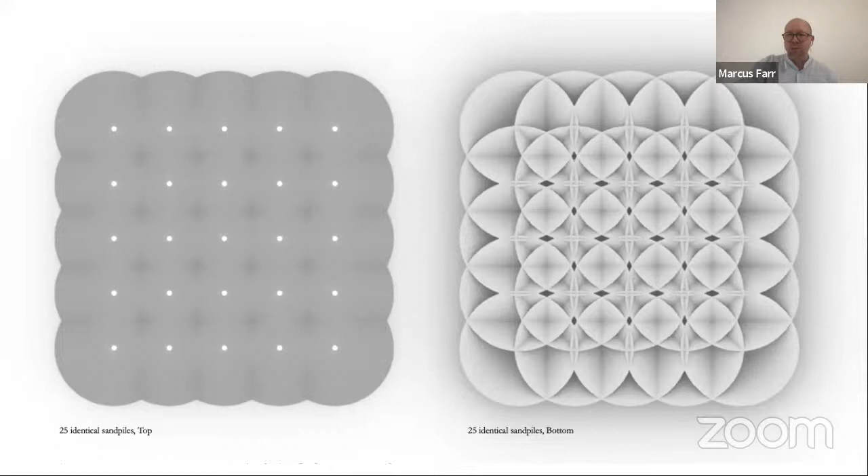And so here I'm showing a computer model of identical resting sand piles on an infinite plane, which is different than an articulated plane. And we have equal distributions of sand, and the angle of repose is all the same. In the image, you can see the bottom of the pile and also the top of the pile.

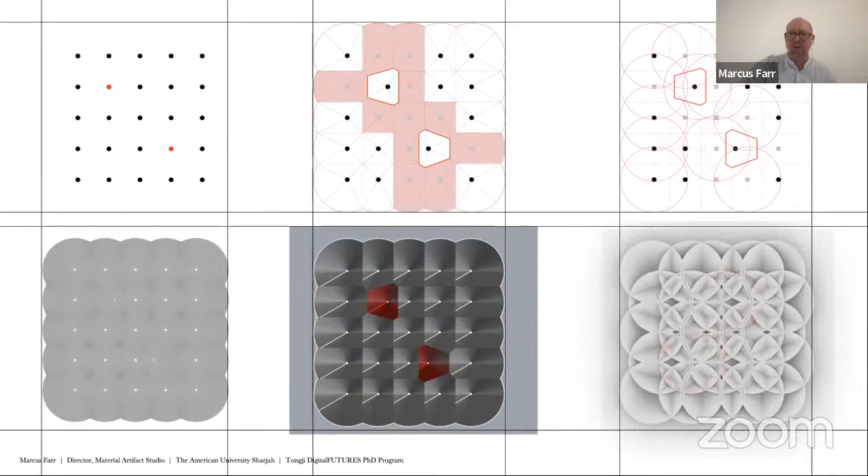So computationally, it's interesting because the logic starts with the grid of points, and you can see that the top and the bottom of the sand pile start to become reactive as a field, whereby the movement of one, or in this case, two identical sand piles start to affect the behavior and the geometry of the neighboring sand piles.

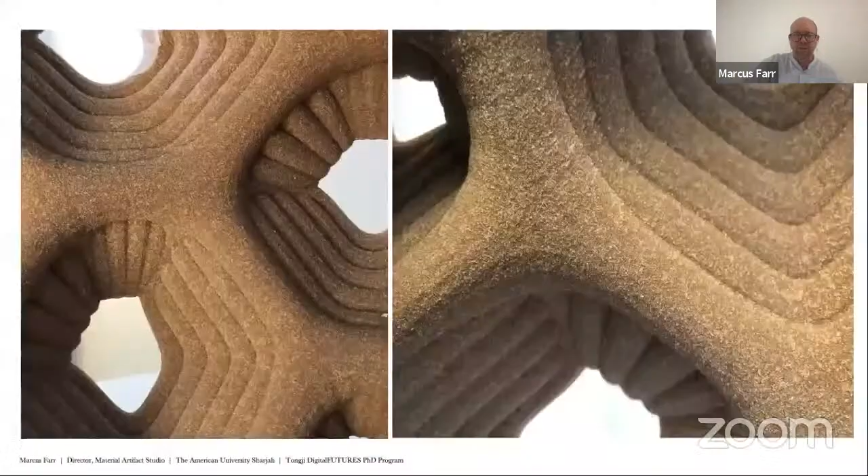And so here we're looking at thinking about the orientation of the sand pile itself, but also the ability for the opening of the sand pile, or in the formation of the sand pile, the drain specifically could be larger or smaller and could create different kinds of sandy effects based on the kind of desired tectonic situation, perhaps circulation, water, wind flow, etc. I'll just show some examples of this as a system, different three-dimensional prints using sand and that logic.

And that's it for the research that I'll share today. And I'd like to stop sharing and just now have an open discussion with Al and with Jumana and also with Neil. And I see that Philip Juan has also joined us. And just begin talking about sand as a medium and as a material and also as a potential medium for new technologies and digital fabrication.

So I'd like to start off just by asking Al and Jumana a question, and that's, what is the potential for sand and technology that you see in the field of architecture? Al, would you like to go first?

Sure. As you mentioned, the amount of actual sand that nowadays we can use is very limited, but about 1/4 to 1/5 of earth is covered by desert, and sand is a kind of abundant material. I don't want to say free, but it is there if we find a way. Something that is interesting for me: in nature, material is expensive. Probably the most expensive thing in nature is material. But for us as humans, that is not the case.

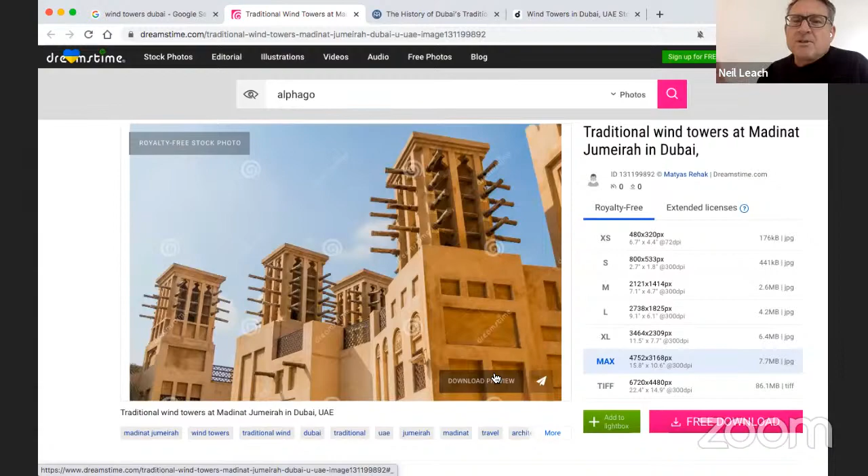And importantly, increasingly with global warming, the world is becoming more of a desert, and we need to use these systems that we've developed historically to try and resolve some of these questions. So let me just stop sharing that. I think there's a lot in sand that really opens up, a whole chapter that you guys are hinting at that is going to really open up in the years to come. So that's why I think this research is so interesting. If we have, go ahead.

Sorry, Neil. Just to go back to these structures that you just showed. You also see them in the Alhambra in Granada, Spain. I remember being there and taking a tour, and this is my touristic knowledge, so don't trust it too much. But the inspiration really came from a situation that really happened,

where the Prophet Muhammad, peace be upon him, was in hiding, and there was a spider web that was protecting him and made the enemies go away. It showed that there was nobody there, that nobody would have been able to penetrate through, and it made them go away. And the inspiration really came from that spider web. That's from my touristic knowledge.

But it's also interesting because if you look at the way that the spider web is formed, maybe there is some relationship to the vernacular structures as well. Maybe that can also be another dialogue. And if you let me share one image that may help us to think about sand in another dimension: this project of Mohammad Reza Ghodousi on Hormuz Island in Iran.